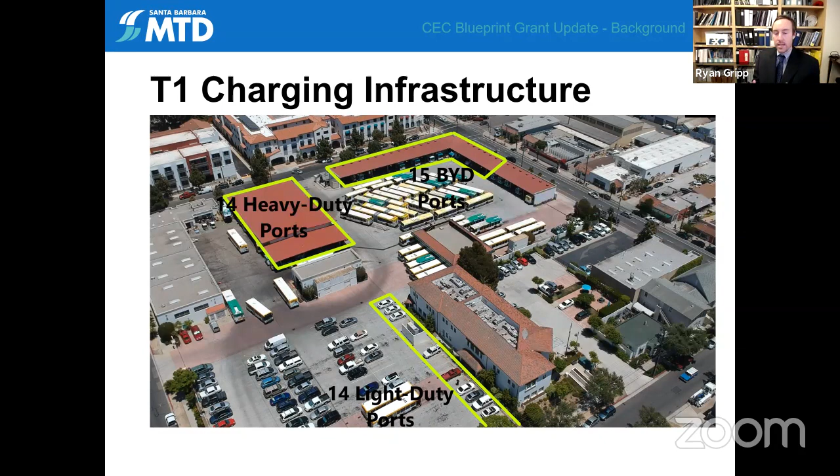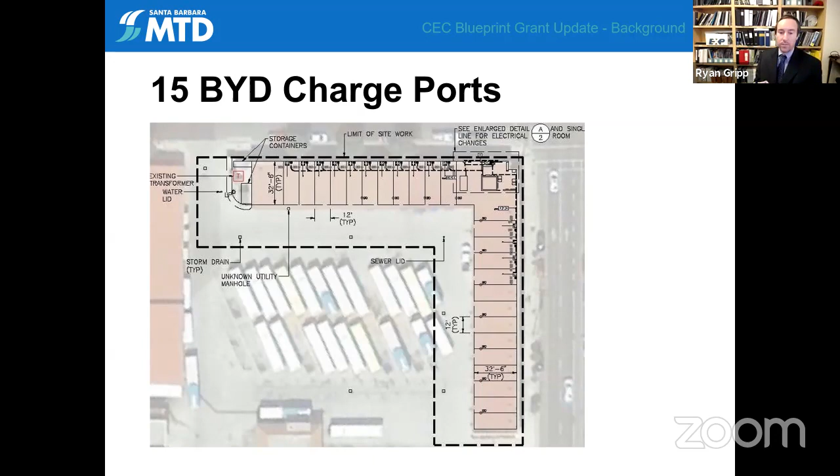Starting off with our first major charging infrastructure project within the past 5 or so years was the BYD charging infrastructure project. Here you can see an overhead view of our electric vehicle charging canopy, near South Salsipuedes and Haley Street. Within that area, we have 15 480 volt proprietary BYD chargers for our 14 BYD buses. We took the 208 volt chargers that were installed to provide power to the electric shuttle fleet, converted and upgraded some of the existing switch gear, which provided us with the electrical infrastructure to charge that particular subfleet.

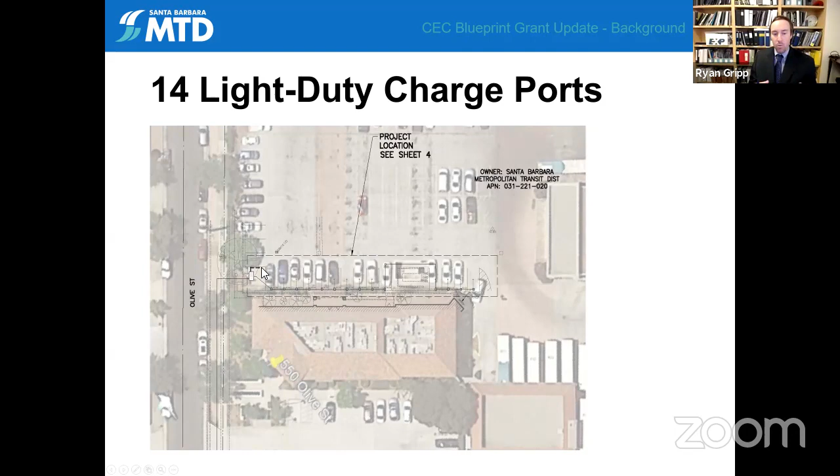The next project we engaged in was focused on the light duty fleet. This was through SCE's Charge Ready program, and we were able to install 14 light duty charge ports for the 10 Chevrolet Bolts that we procured. That's adjacent to the admin building, to give everybody a sense of where we're located. SCE, as part of that project, also installed a new pole-mounted transformer off of Olive Street to supply the power necessary for that particular charging infrastructure project.

And finally, this is a project that is in process. At the last board meeting, members of the board approved staff to move forward with executing an agreement with SCE under the Charge Ready program for the installation of 14 heavy duty charge ports. Some of the notable components of this project is that we will be installing a new pad mounted transformer to supply the additional electricity or energy needed for those particular chargers. So this one is in progress.

Just a comment, if you're moving a cursor around, I'm not getting it. Fair enough, thank you. Ryan, just for the viewer, the cursor is very, very small, so a verbal description probably would be best. Perfect. Go ahead, Bill.

Mr. Gripp, is this the same rooftop that the solar is being projected for? That's exactly right. Yes, if we go back one slide. This particular rooftop, this was the new canopy that we put onto what was an existing canopy, and we upgraded it. We did seismic retrofits, new roofing, and a raised canopy to support maintenance of battery electric buses, since batteries are typically on the top of the buses, as well as other places of the bus. This reflects that particular canopy and an area that we intend to install photovoltaics.

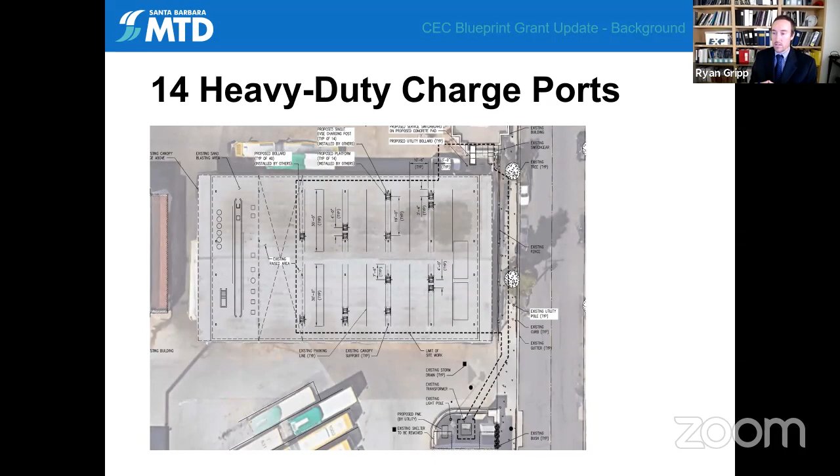So that sets up the background for why we're pursuing this particular grant funding opportunity. Some general details about the grant: this is a California Energy Commission grant, and it is a planning grant. So if awarded, there will not be any implementation that will take place other than the actual creation of the plan. Any infrastructure that will be installed as a result of the plan will take place at a time outside of this particular funding opportunity. The maximum grant award available is $200,000.

We will be submitting our application by the November 13th deadline, and the CEC is anticipating notice of award around December 2020. It's important to note that whatever their staff recommendations have in terms of the award, that does have to go through the board, the CEC board.

So what is our proposed project? Just one quick question, yes. Total amount is $3 million, and we're applying for the $200,000. Correct. Is there anything within the grant relative to the awards themselves in terms of a maximum award per recipient? That would be the 200,000 is the maximum award per recipient. Good, that's what I needed to know. That's perfect, thank you. Not a problem.

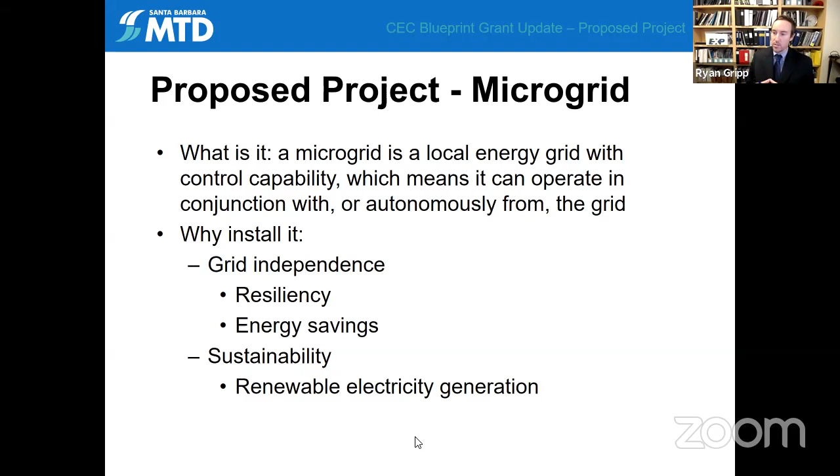And then the other component is sustainability. If your microgrid uses renewable energy generation, that makes for very green energy production. Now the California grid, particularly SCE, is purchasing a lot of renewable electricity as it is, so California has a fairly green grid. However, implementing our own microgrid here at Terminal 1 using renewable electricity generation improves it that much more.

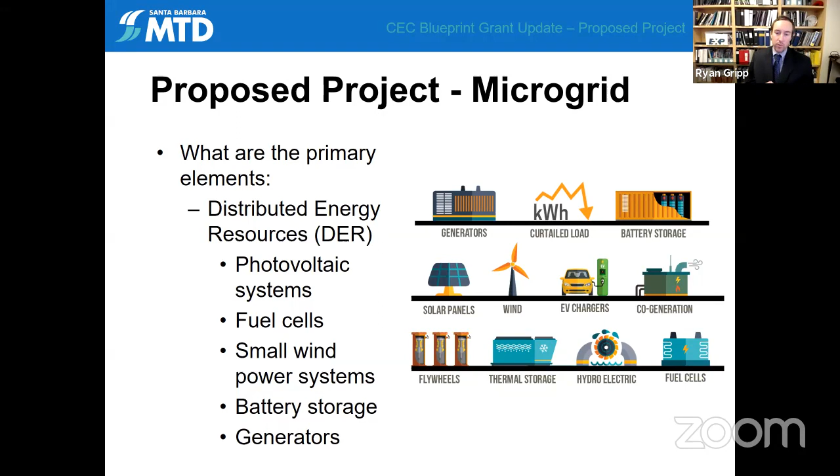So for project implementation, the initial phase will be a needs assessment. The planning team will come to Terminal 1, look at the space constraints we have, which is one of the elements we'll have to work with here since we don't have a lot of space, and make determinations of where the equipment will go, how much equipment, and what MTD's resiliency goals are. Do we want to be partially independent from the grid, or fully independent from the grid?

Will the microgrid be there to supplement the existing power we generate from the utility, or do we want to fully generate our own power? Then there's the site analysis piece, to take a look at the type, size, and quantity of the distributed energy resources we plan to deploy here at Terminal 1.

And then engaging in the actual plan development. A key piece of plan development will be the economics of a microgrid. What are the costs going to be for MTD? What are the savings going to be for MTD? It's heavily capital intensive in terms of these pieces of equipment, and then you have the operating expenses. What are the ongoing maintenance and operating expenses associated with having this equipment on site? Do we need a specialist to monitor this equipment? These are all conversations that will take place through plan development.

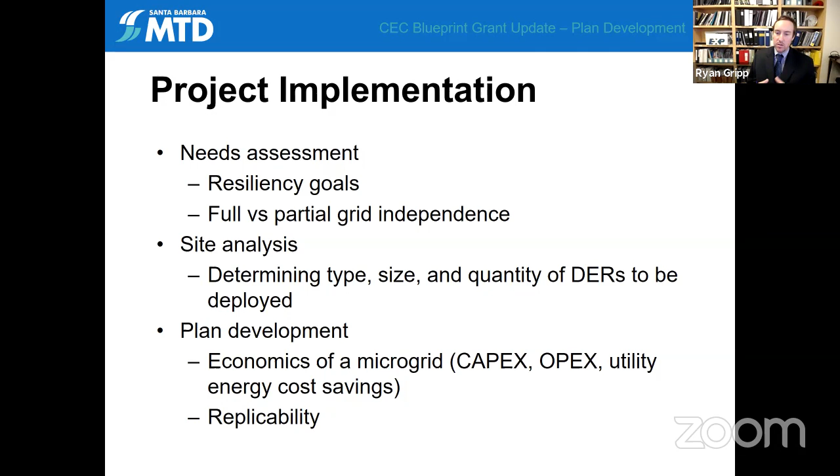And as a result of that, here's what we can do with this distributed energy equipment that we plan to procure. A key piece for the CEC, and important in the industry, is replicability. So what we intend to do is write the plan in a manner that other agencies can pick it up and adapt it to implement their own microgrid strategy, which is really important as more and more fleets are moving towards transportation electrification.

So the grant partnerships, as General Manager Estrada mentioned, we are partnering with the City of Santa Barbara. We are very excited about this partnership. We work closely with them anyway, and they are engaging in so many important climate change initiatives, curbing carbon emissions within the city and beyond. This is the first of many collaborations with the city, as well as CalSTART. MTD has worked with CalSTART in the past; they are a leading clean transportation technology solutions consortia, well thought of in the industry, and they have a lot of resources they can bring to bear to help support us in developing the microgrid plan. With that, I'll pass it along to Hillary.

Good morning, Chair and Board. Good morning, Hillary. So Ryan's done the lion's share, but I'm going to talk a little bit about something Director Sheeler brought up at our last meeting, and that's some of the local clean energy initiatives going on in our region, in our service territory.

And the biggest is community choice energy. We sort of have two - they're not competing with each other, but they're both happening in our service territory. The first one is Central Coast Community Energy. Some on our board are well aware of what community choice energy is, but just to review: it's something the legislature enacted several years ago, and they've been popping up over the state.

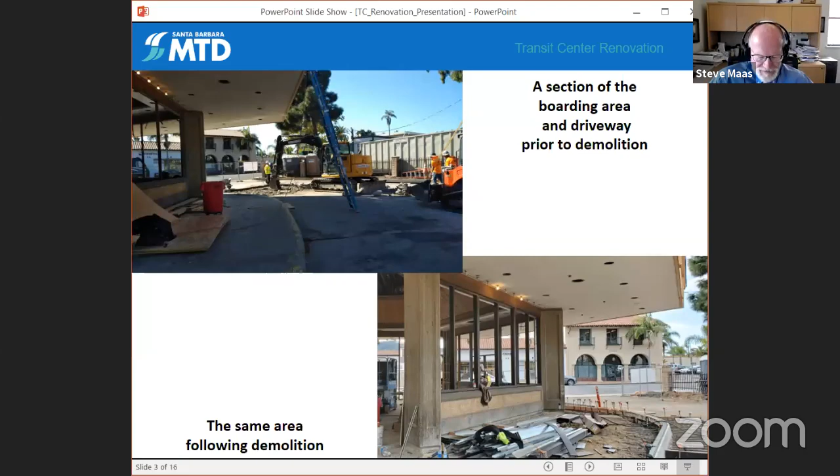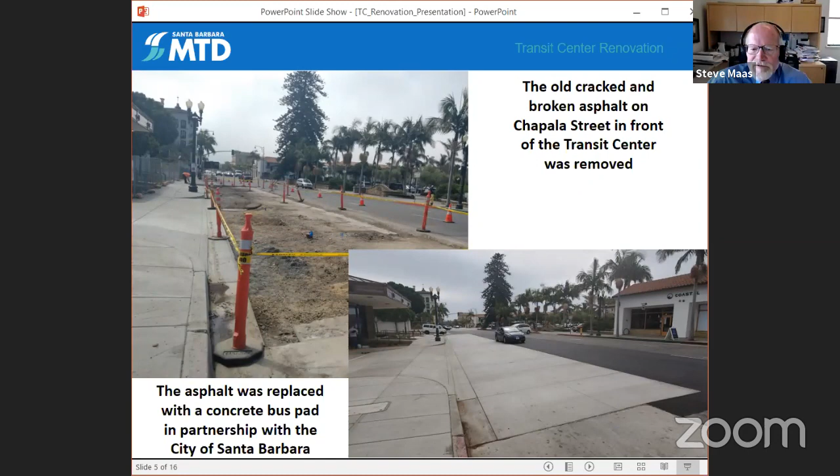In front of the facility on Chapala Street, that area was all asphalt, and it was very cracked and broken. The original plan was to just replace it with new asphalt, which would have been nice at the time but wouldn't have held up as long. What finally happened was we worked with the city, the contractor, and Lash, who does street work for the city, and reached a partnership where the city paid for the cost of the concrete pour, and we paid for the pre and post pour work. We got a very nice new concrete bus pad all along the frontage of the transit center, which will hold up for a long time and is a much bigger improvement over the asphalt that was there previously. We had a real good relationship with the city there, and we were happy to come to that agreement.

This is a couple pictures showing the installation of the new roof, which is beautiful, if some of you have seen it. The fascia as well, in the lower picture, was done with metal this time, with copper. The previous one was wood and had gotten very damaged over the years. So we went with all metal this time, and we think it really did a good job on that. We're very happy with that.

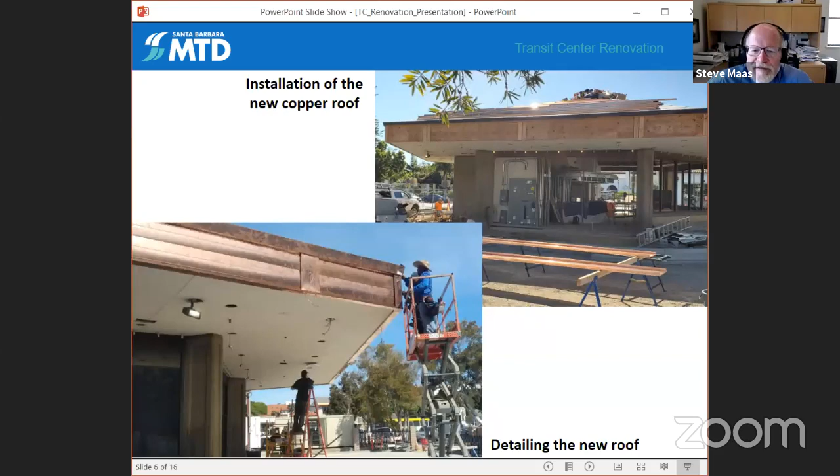The old control room, or fishbowl as it was sometimes called, was really outdated, wasn't big enough for the uses it needed, and wasn't efficiently arranged for really efficient use. So we did a new one. The lower picture shows it being under construction from outside. As you can see, it's a metal framework, metal studs and so on.

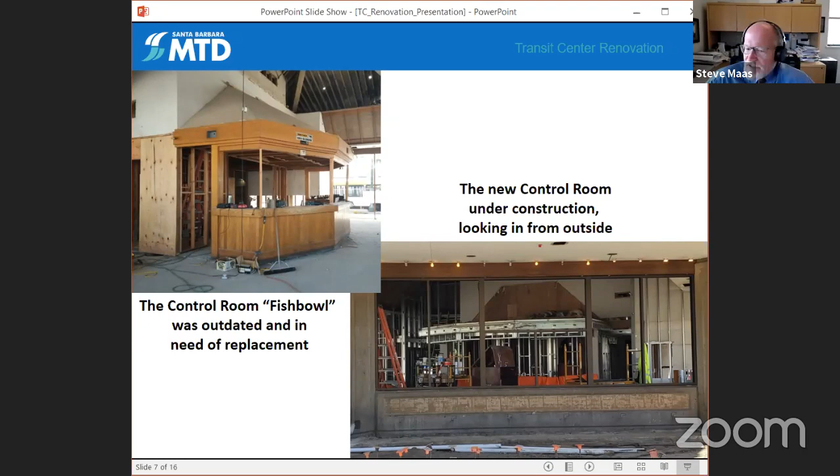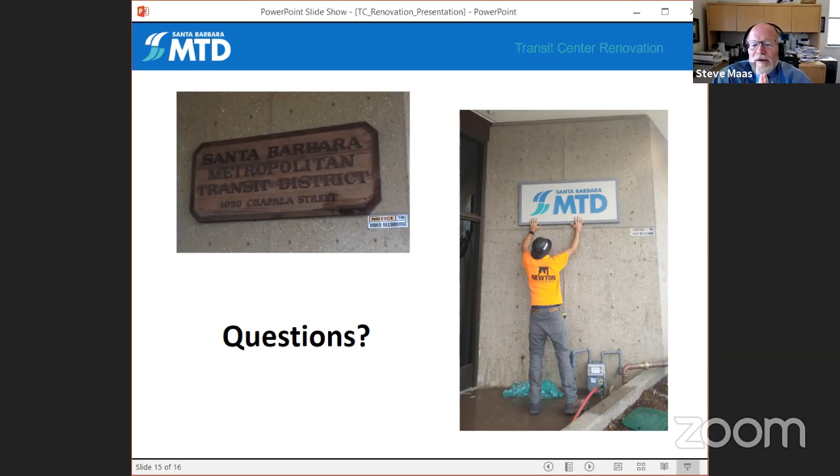It's kind of the finishing slide of my presentation. If there are any questions, Pablo, if you could go to the next slide, we'll leave Hillary's video playing with no sound in case there are questions. That shows kind of the same things I showed you in a video format. With that, I'd be happy to take any questions.

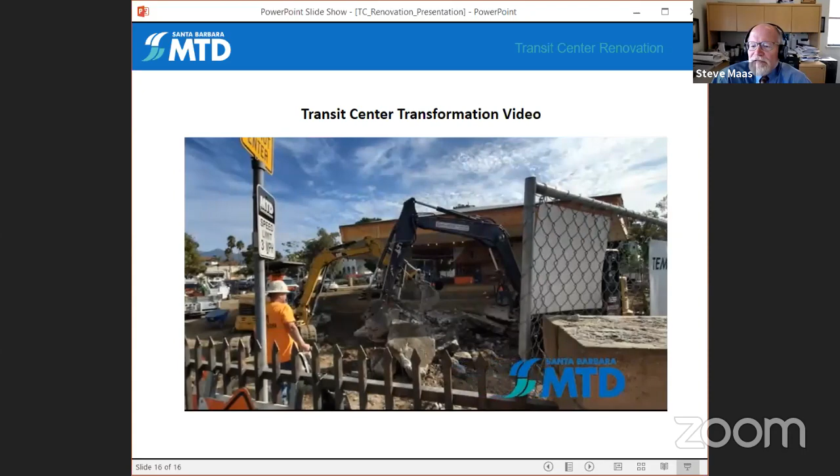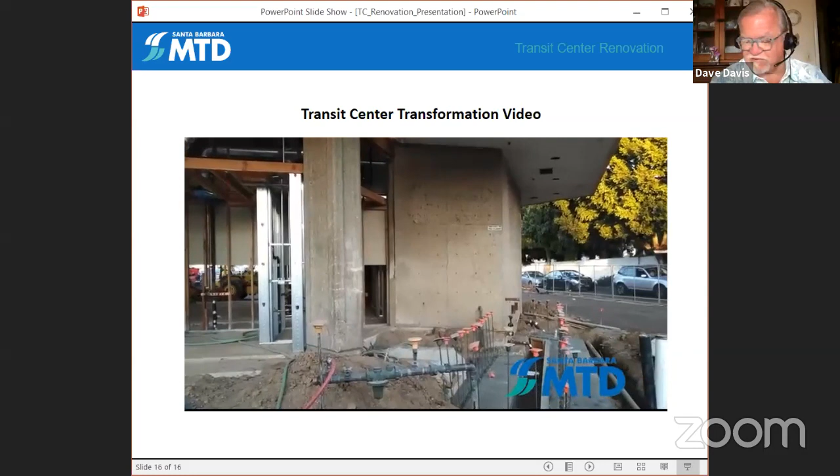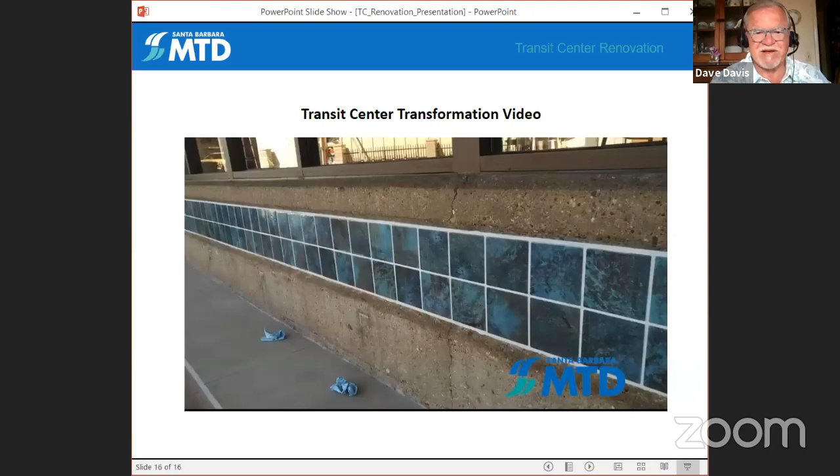Great, thank you very much for the presentation, Steve. Thank you for the great pictures and the video tour in that regard. I will just start before I ask for any comments. I just think the staff did an incredible job of the transition during construction, because I know how disruptive it must have been for everybody. And very frankly, everybody bore with it and made it happen. So again, great thanks to the entire staff for making the transition from the old building during construction to now. And we're not quite done, but we're heading there. So comments from the board, questions from the board.

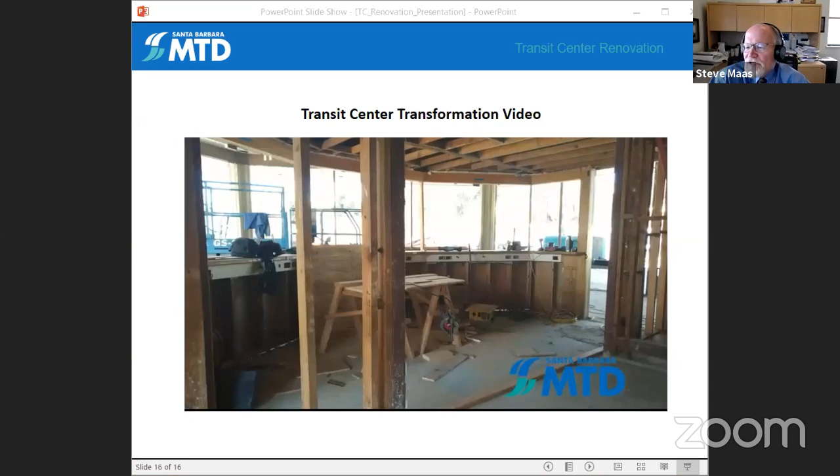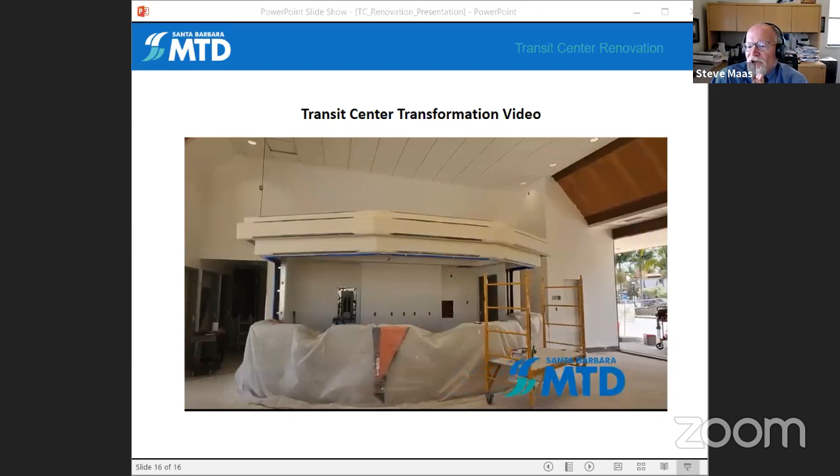Sure, Davis, if I could comment on that. If you read in the staff report, every employee pretty much at MTD had a major role in this. And what I didn't mention in the staff report, one is our architect with LMA, Gowdy Mission. He was, in a sense, my lifeline. Me not being an expert in construction projects, I was very reliant on him to be the technical expert that I needed throughout the process. And of course, without General Manager Estrada, the project wouldn't have happened at all. And it would certainly be remiss to not thank Jerry for being the guiding force behind the whole thing.

Yeah, Jerry, I think you would second my thanks to the city of Santa Barbara also in working out the problems that we did have, and also basically becoming our partner and making a lot of these things happen. Yeah, absolutely, Chair Davis. Once we really got rolling, the city was great to work with on the transition. They've agreed to allow us to use some of the additional or temporary parking areas along Figueroa Street to help during the pandemic, so we don't have to put everyone back in the circle. And as Mr. Maas mentioned, the partnership in the middle of the project to get the concrete laid in front of the transit center, which wasn't a part of the original plan, was, I think, a good example of how we can really get things done when we work together. And really impressed and appreciative of their efforts, but also again the staff, all of our employees, drivers, supervisors have been participating throughout in giving us input and comments, and it's all come together well. And I appreciate Ryan for getting this project started, and then Steve Maas for taking it from there and bringing it home for us as the project managers throughout.

Okay, board members, comments.